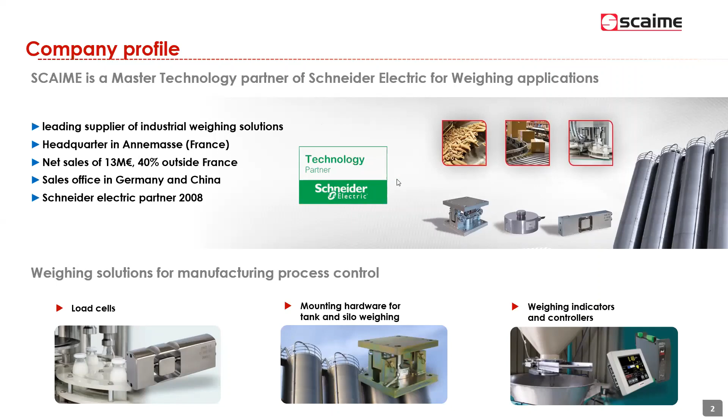The area of expertise of SCAIME in weighing applications covers both plant engineering, whatever the field of application—food and bev, metals and materials, chemicals, etc.—and machine control. Machine control is the integration of load cells and transmitters into equipment such as a dosing or filling system, which is then installed into the manufacturing process. For plant engineering, we can intervene directly at the level of tank weighing or belt weighing, for instance.

On the right, you can see those areas of expertise, which can be split into static weighing applications, like regular platform weighing, or tank, hopper, vessel weighing, and dynamic weighing applications, where you have belt weighing and loss-in-weight feeding—in both cases continuous weighing—or filling by batch, and sorting and check weighing.

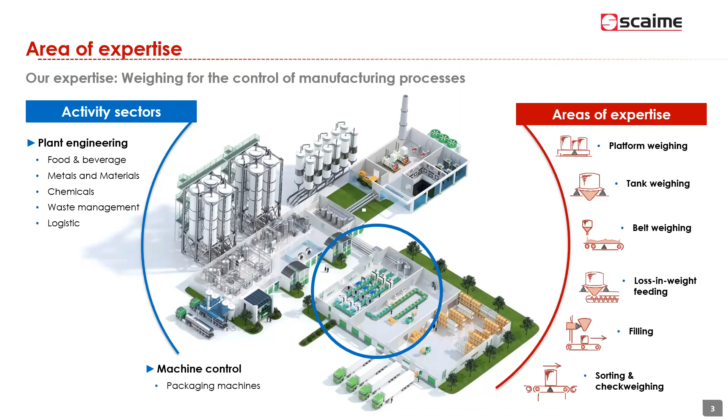So you can see the sequence of these in what can be a manufacturing process, how you see those different steps in the production: storage, transfer by belt weigher for instance, mixing—can be loss-in-weight feeding or batch dosing—packaging, that can be filling, bag filling, drum filling, etc., and end of line check weighing.

At every step, we have the possibility to provide a solution that is connected to a PLC, with the functionalities that we are going to show you in the following slides.

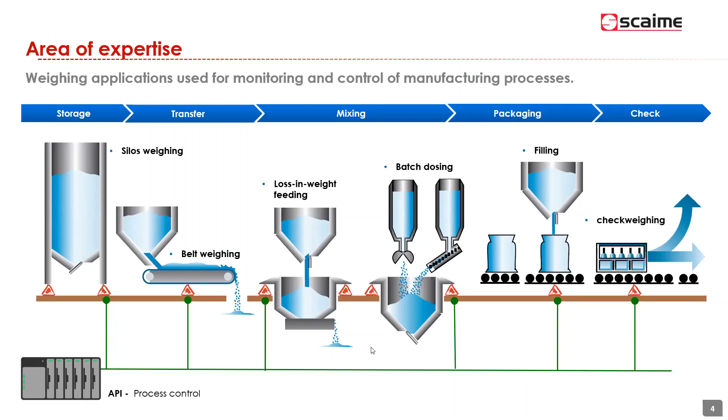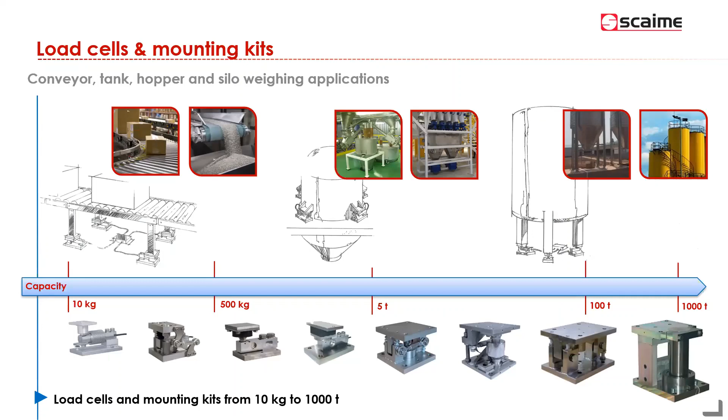This one is just to show the hardware—whatever you have to weigh, a conveyor, a tank, a hopper, up to 1,000 ton nominal capacity per load cell, we have a solution including a load cell and a specific mounting kit. You will find much more detailed information about each of the models of load cells and mounting kits on our website with a dedicated data sheet.

Weighing solutions for EcoStruxure: we have two ranges of transmitters that can be applied and that are compatible with EcoStruxure, for which information can be found on exchange.se.com. On the right, first, a specific product, the PMESWT weighing module.

This one is a co-development between SCAIME and Schneider Electric, specially dedicated to the M580 PLC, and therefore applicable to plant process. On the left hand side, the other range of transmitter or weighing controller, the eNod4 range, which appears in many different versions—we will see that later—with various dedicated functionalities according to the case, according to the application. Therefore it can be applied as well for machine and for plant process, and is compatible with many models of PLC in the Schneider Electric range.

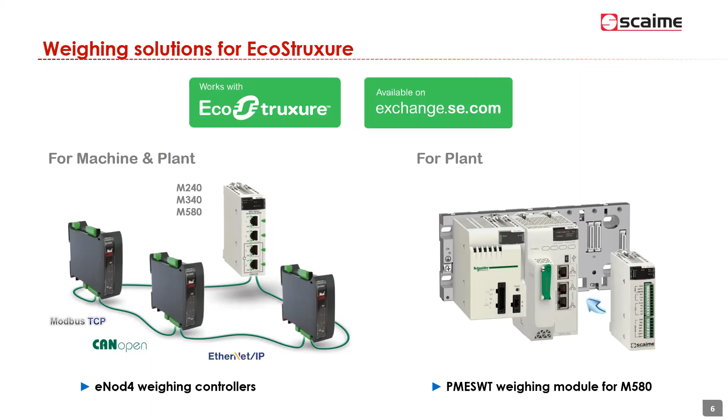So let's start with the PMESWT weighing module. It's a single channel weighing controller. That doesn't mean it can only run one load cell, but one weighing chain. So you can have, as shown on the drawing, several load cells connected to a junction box that goes into the transmitter.

From the start, the purpose was to be able to plug this weighing transmitter on the backplane of the M580 and communicate directly with the M580 on Ethernet. It can also be plugged on the X80 RIO drop. You have an output port for an optional HMI, and it's available as standard with 2 inputs and 4 outputs.

Because of its shared design with Schneider Electric, from the start we had the possibility to access all the parameters and do the calibration by using FDT DTM technology. There is also a TVDA available, including function blocks for EcoStruxure Control Expert, as well as library blocks for Wonderware System Platform.

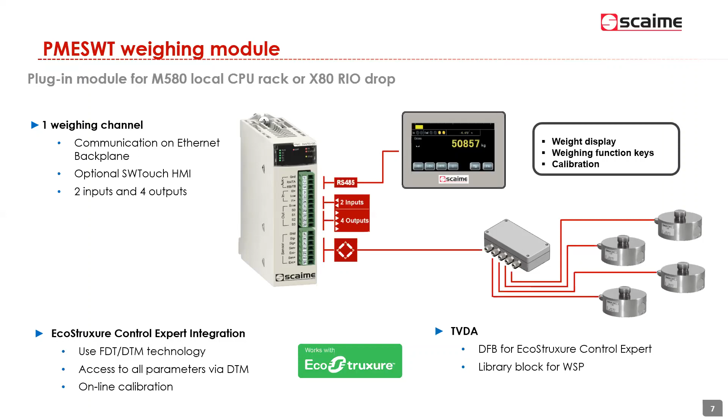The second possibility is the eNod4. The second range of weighing controller is the eNod4. This is a range that is purely designed, 100% by SCAIME. It started with a previous version back in 2007 called eNod3, so it's a continuation of a long-term development.

The difference with the PMESWT is that the eNod4 exists in different versions. Already in terms of presentation, there is a DIN rail version and also a version which can be mounted inside a stainless steel housing. In this stainless steel housing, you can integrate an optional touchscreen, the HMI eNodTouch.

The configuration of the eNod4 can be done from a PC using the eNodView software directly connected to the eNod4, or via an integrated web server that is standard in each eNod4, or as an option via Bluetooth with what we call the eNodApp. That's optional, but it allows you to set up the parameters and do the configuration remotely from your smartphone.

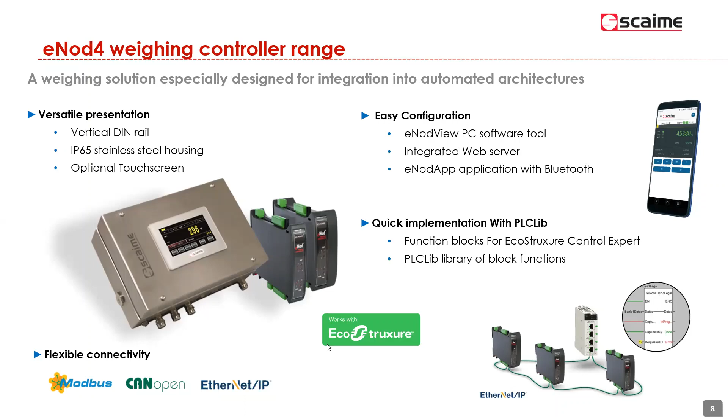You obviously have a USB port for PC connection. You have the optional Bluetooth port if you buy the option for the eNodApp. There is a dedicated RS485 port for connection with the HMI. IOs, of course, as standard 2 inputs and 4 outputs, plus some optional inputs and outputs, as well as an analog output for regulation, especially for continuous weighing applications.

And of course, a lot of protocols are served with eNod4 in different versions. That can be CAN-open, Ethernet IP, or Modbus TCP, for instance.

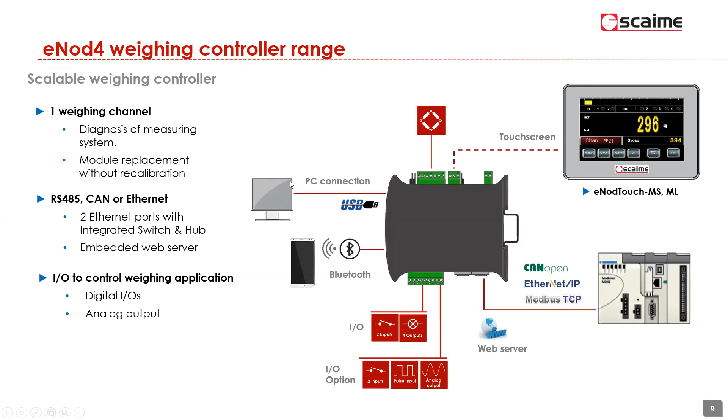The eNod4, as I said, exists in 5 different versions according to what you want to do with it. It starts with the eNod4-T, which is the basic transmitter version that includes the functions common to all versions of eNod4, if you don't want to use it with specific software.

And then, according to the application, you have 4 other versions which include dedicated software: eNod4-D for everything that is dosing and filling, eNod4-C for check weighing or grading, eNod4-B for belt weighing, and eNod4-F for loss in weight feeding.

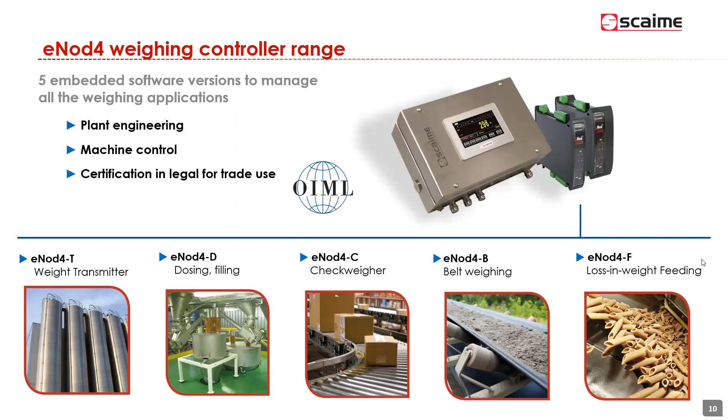So for the moment, in the EcoStruxure connection, we have function blocks and TVDA with Control Expert. Machine Expert is not available for the moment, but this is something that is definitely going to be developed in the months to come, I suppose.

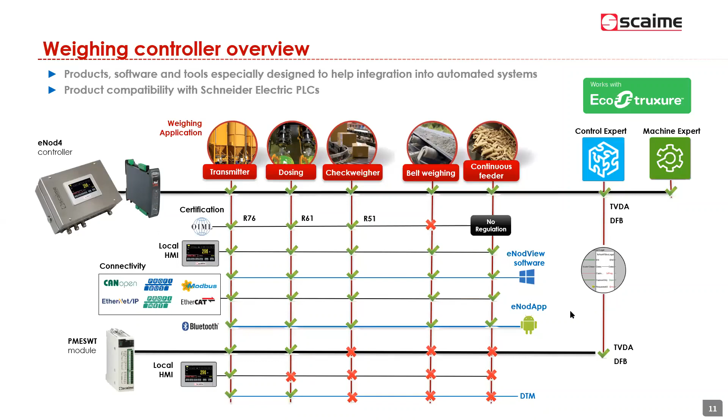Now we are going to have a look at various success stories, or examples of applications where our load cells have been implemented successfully within an EcoStruxure Schneider Electric environment of different kinds. And we go by families of applications.

The first family is plant process. The first example is a modernization of a brewery belonging to the Heineken group in Congo. That consisted in revamping a TSX Premium architecture into an M580 design architecture. We supplied everything: the load cell, the mounting kits, the PMESWT modules. In that case there were, I think, 9 of them, but I'm not sure. Anyway, load cells, PMESWT, and HMI connected to M580 for the level control of a series of tanks.

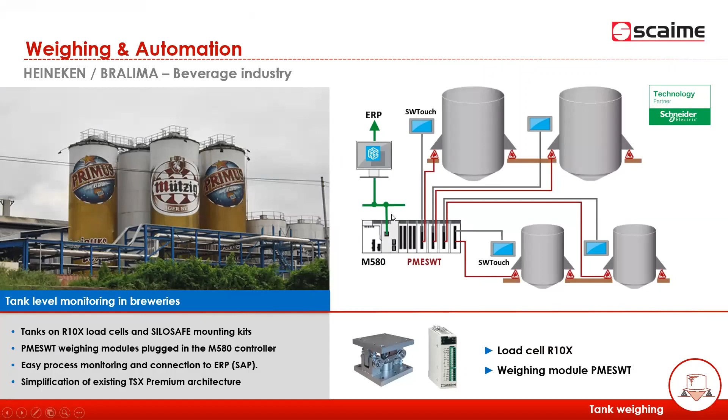The second example is a factory in Peru, Latin America, where they produce food for poultry. That was a complete modernization, starting from A to Z, including the load cells. 11 systems, each time a PMESWT module connected to M580. The idea was to turn a quite old factory into something more efficient, and the production capacity has been significantly increased from 5 tons per hour to 40 tons per hour. The weighing systems were used at different steps, not only static weighing but also in dosing and mixing applications.

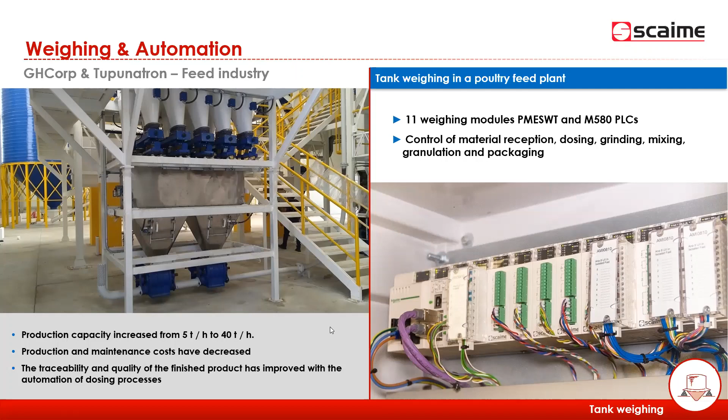Another modernization, this time in Switzerland at the Syngenta factory, manufacturing herbicides. In that case the load cells were not changed, they were still good enough, so the modernization started at the level of the transmitter. We used eNod4-T, connected to M340, using Magelis HMI. A specific aspect here is that it's a potentially explosive atmosphere, so we had to supply Zener barriers to protect the load cells and the junction box — that's also something we can provide. In that case, 19 controllers in eNod4-T, Ethernet, communicating Modbus TCP with the M340.

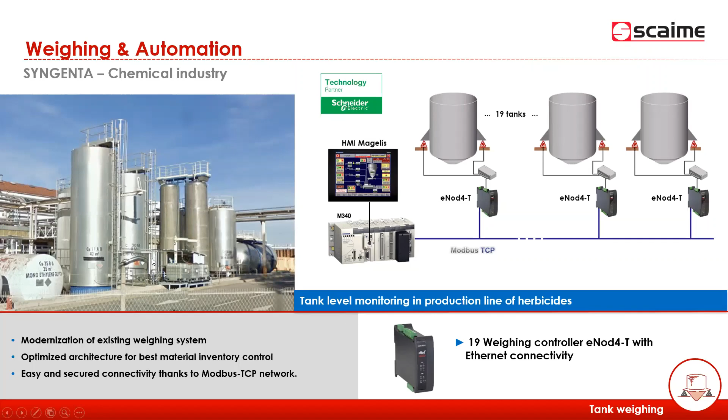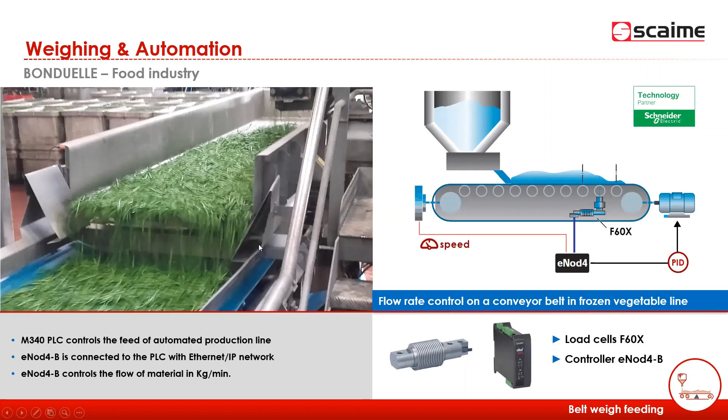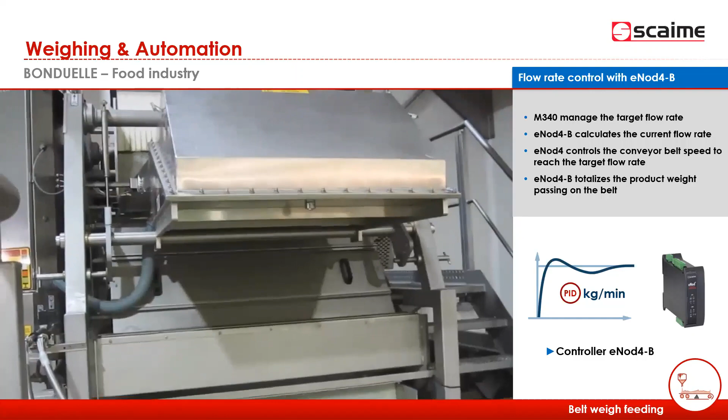We'll see on the next slide a video showing the process. The eNod4-B in that case calculates the current flow rate and corrects, if necessary, the speed of the conveyor belt in order to maintain the flow rate according to the target. If needed, it can also totalize the product weight — the weight of the product passing on the belt over a certain period.

This is something we installed 2 or 3 years ago, and it works very, very well. Our modules manage the PID control — the PID regulator is embedded inside the eNod4-B. That's why you have this optional analog output on the B and F versions, because it is necessary for the PID control.

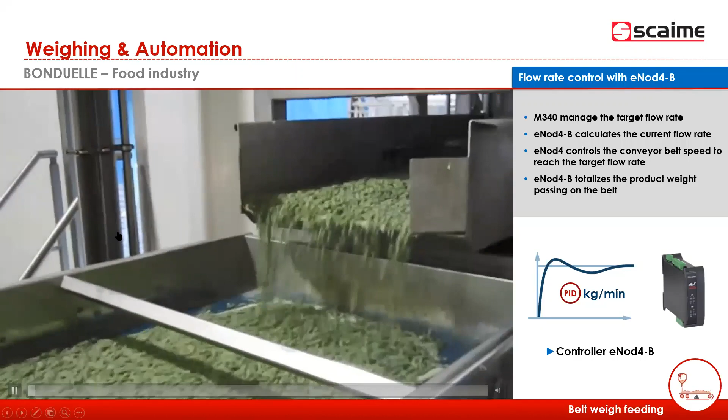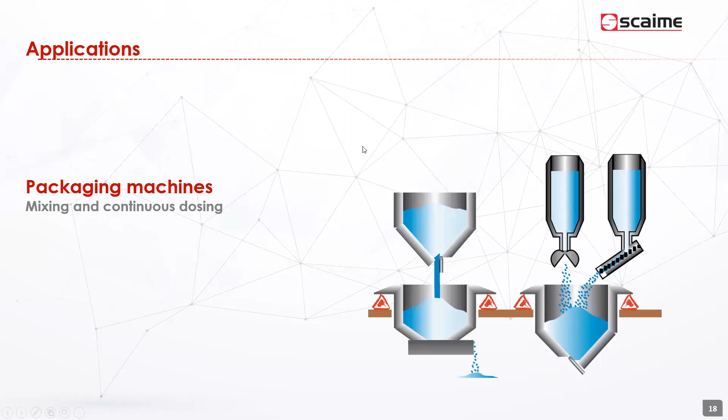Another family of applications are packaging machines, where we are going to see some mixing and continuous dosing applications. The first one is a customer of ours in the south of France called PPI. This application consisted in dosing 7 different ingredients, each coming from a suspended bag. Each of the ingredients goes on a belt, and after that is filled into a bag. We've been using eNod4-D to monitor the dosing parameters on each of the hoppers, with communication to the M340 via Modbus TCP.

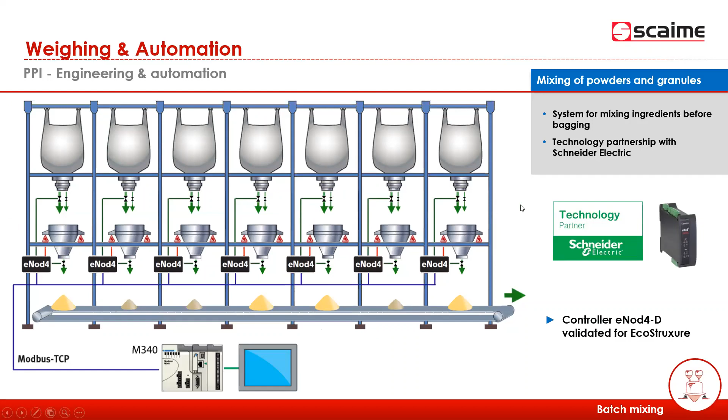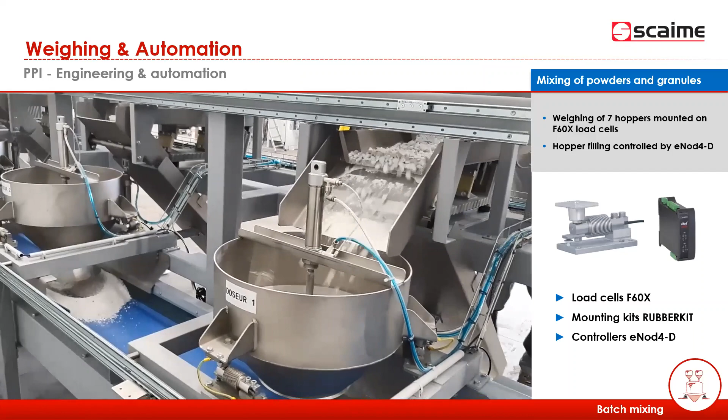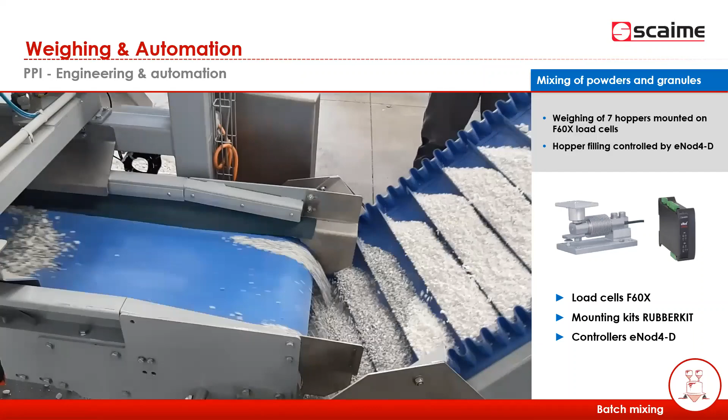The M340 manages the formula. This is obviously a mining and mineral application, as you can see, with very different ingredients. You can see the load cells on the hoppers there — bending beam load cells. It's a rather rugged application, but it does the job: mixing different ingredients, gravels, and everything.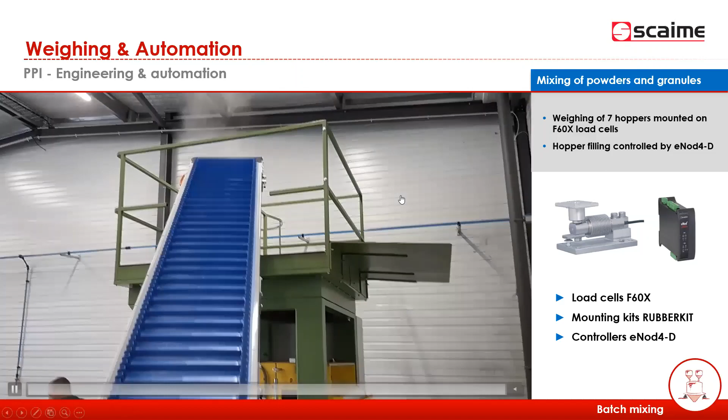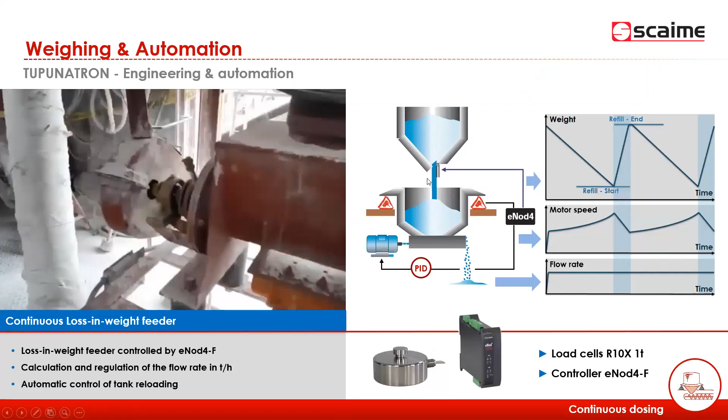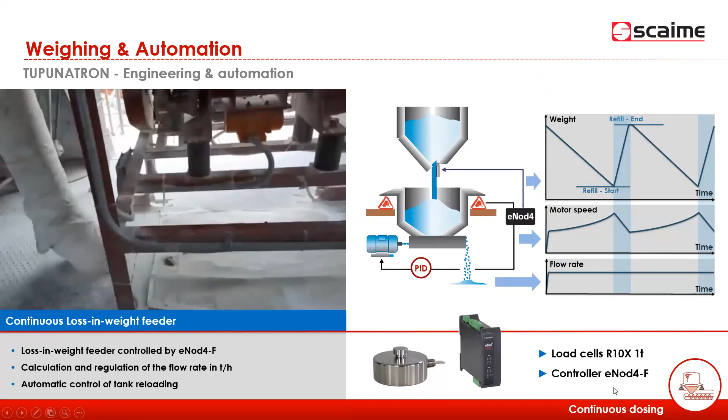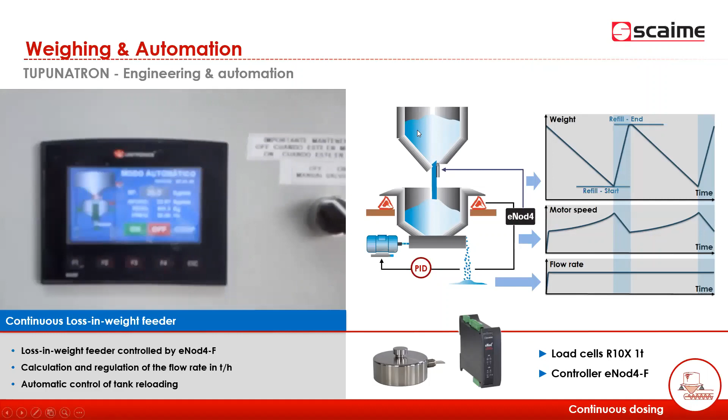PPI is specialized in powder handling applications, so it does also the same kind of thing with food. Here, the video is not very clear, but it shows an example of a loss-in-weight application, also in mining and mineral — lime in this case. The idea with the eNod4-F is to control the flow of products by regulating according to a target flow rate. But in this case, instead of being on a belt, it comes from an upper hopper filling into a hopper equipped with load cells, from which we can regulate the flow that goes after that onto a belt or into a bag. We are also using the PID in this case to control the regulation and also to monitor the reloading of the tank.

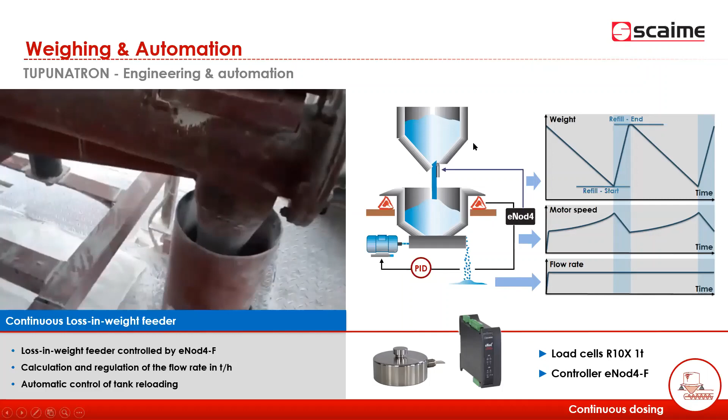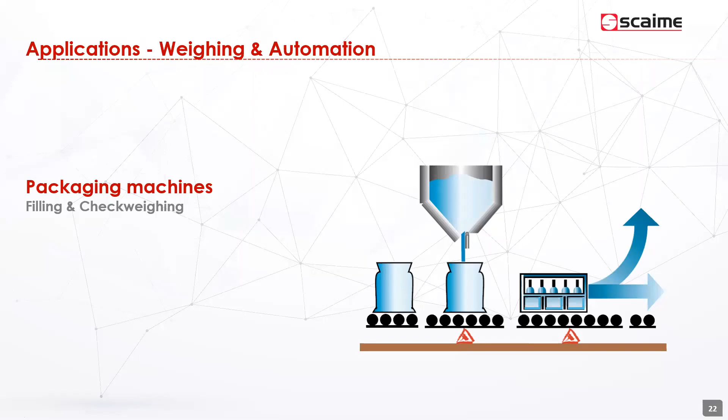Here now we have another family of applications: packaging machines with filling and check weighing applications. This one is using eNod4-D connected to M340.

The purpose of the dosing here is to dose a sauce that will go into fish cans. Actually, it's not always the same dose of sauce that goes into the can. What the eNod4 can do in this case is calculate, can by can, the amount of sauce needed according to the weight of the fish, which is never the same in each can. So it goes at a high speed with a 1 gram accuracy.

In this case, we are using load cells which are hermetically welded, IP69K, a standard that authorizes cleaning of the load cell with a high pressure jet.

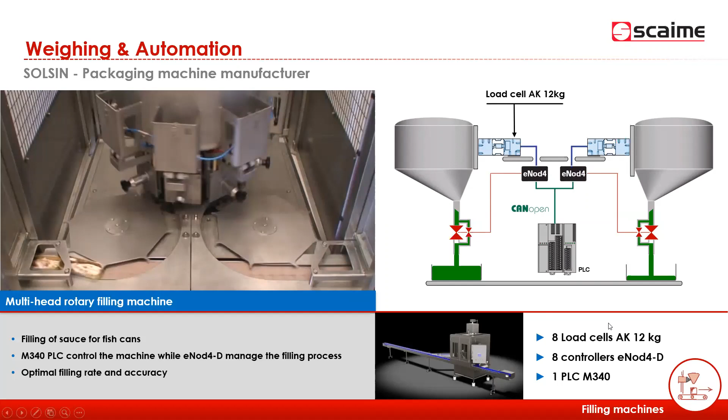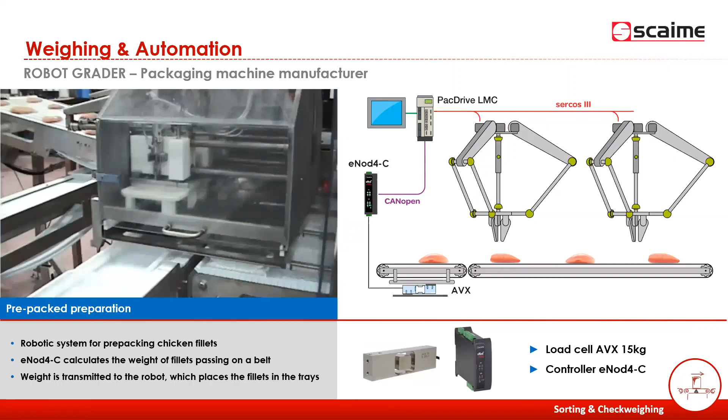Another application that tends to be more and more popular where weighing is needed is pick and place. Robot Grader is one of our customers in Sweden. They are manufacturing these pick and place machines for food, and most of the time it's chicken fillets, chicken bits.

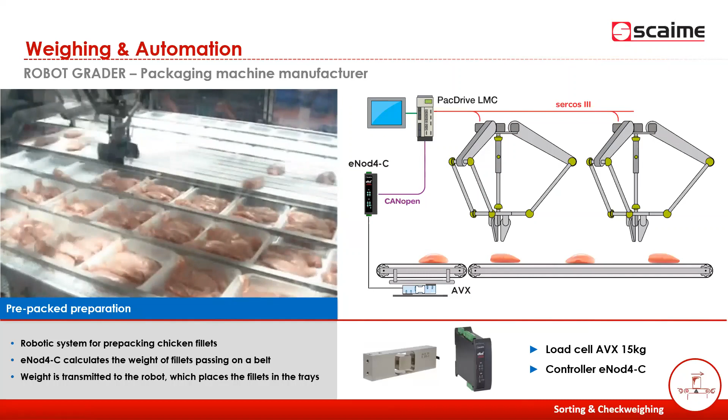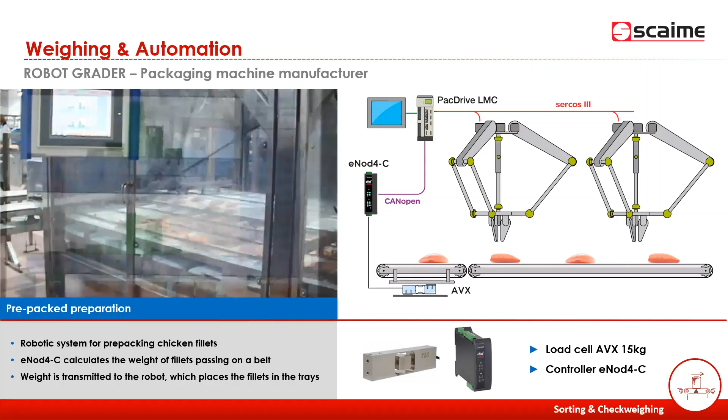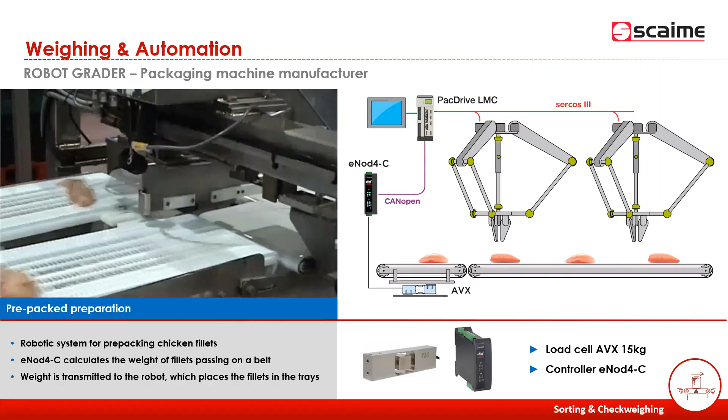We start by weighing each fillet on a check weigher, so it's not end of line, it's beginning of line. The weight of each fillet is calculated by the eNod4-C, so it's the transmitter who provides the PLC the accurate weight. In that case, it's a PacDrive LMC that stores the information of each fillet and combines the fillets to put them in a tray.

In order to reach more or less always the same target weight per tray, that's a quite interesting application because not only is the environment complicated, and there again we have to use hermetically sealed load cells with a high protection level, but the demand in terms of speed is quite high.

Another application where speed is very important: this one is a grader for fruit by one of our customers in France. There again we are using eNod4-C, and in this case it is connected to M241.

Each fruit is passing on a chain of cups, and the cups are weighed one by one. The weight of the fruit is calculated by the eNod4-C and transmitted via CANopen to the M241, and the M241 is going to decide on which table the fruit is going to be dropped according to its category of weight.

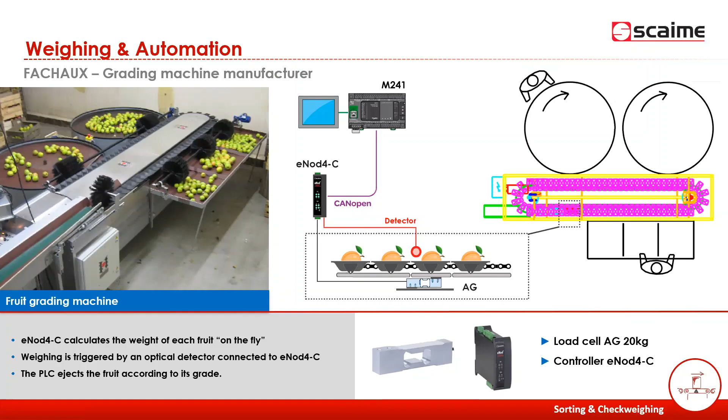So you can see here on the video. To give you an example about the combination between speed and accuracy, in this case we could reach a rate of 12 fruits per second with an accuracy of 1 gram.

This is a quite regular application of fruit grading in many countries when you need to sort plenty of different fruits. We have done that with small fruits like this, but also one customer is doing that with melons, for instance. So that can be adapted.

Of course, the parameters, especially the filtering parameters, which are very important in an eNod4, vary according to the weight-to-volume ratio of the fruit.